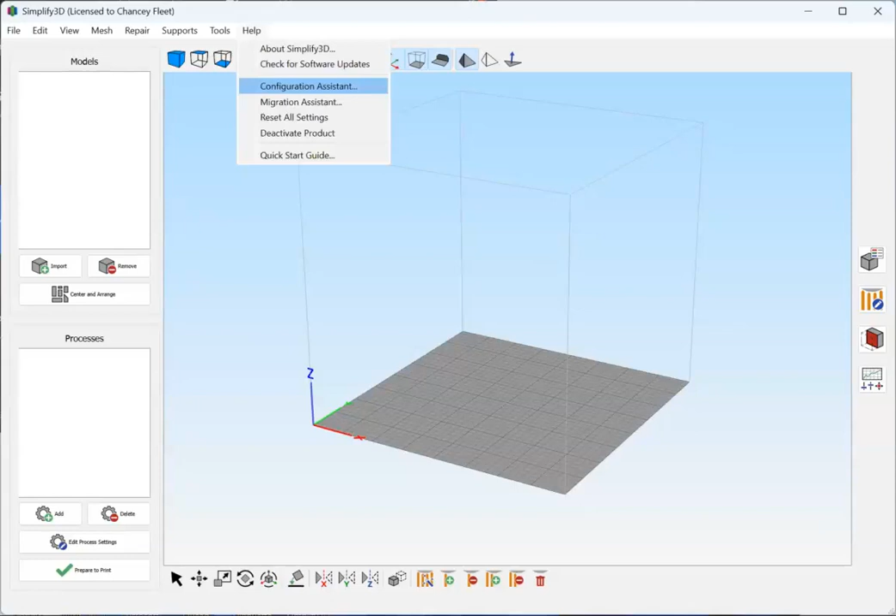File, edit, view, mesh, repair, collapse, supports, tools, collapse, help, collapsed. So I'm coming into help, and I'm going to find the configuration assistant. About, check for software, configuration assistant. And I'm going to press enter on configuration assistant and get myself into the workflow for setting up a printer. Configuration assistant dialog. This wizard will help you configure the software for your 3D printer. Click next to retrieve a list of available profiles and select the best one for your machine.

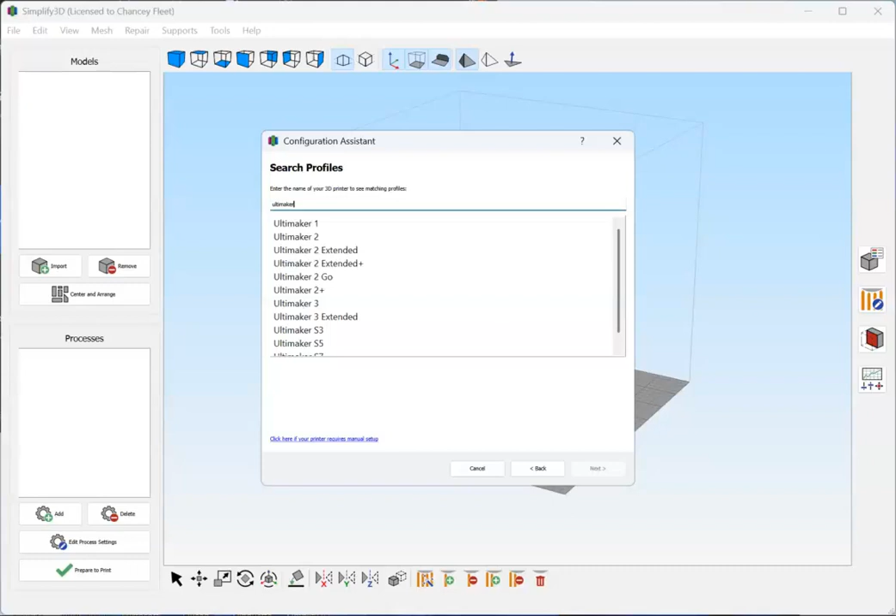Next button. Now I can search for my 3D printer of choice. I'm going to type in Ultimaker and arrow down. Ultimaker. I'm going to have to press enter actually to get to my list of printers. I tab once to get to the list. Ultimaker 1 list item focused. And there's a bunch of them here. I have a 3 beside me. Ultimaker 2 Go list item. Ultimaker 3 list item focused selected.

So I'm experiencing a strange little screen reader artifact where if I arrow down, it is not reading the name of the 3D printer. And if I use my read current field command, my screen reader key with tab, it's not updating. But if I tab and then shift tab, it updates me and gets me to the right place. I'm using NVDA today. I'm using version 5.1 point something of Simplify today. This may impact you and it may not. If it does, just tab away and tab back. Sorry about that. So I've picked Ultimaker 3, which is the printer that I have.

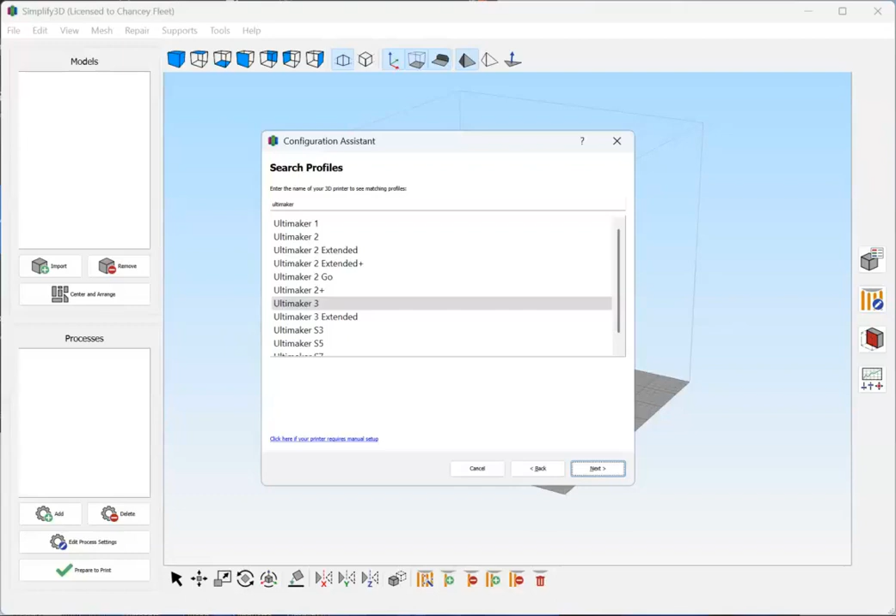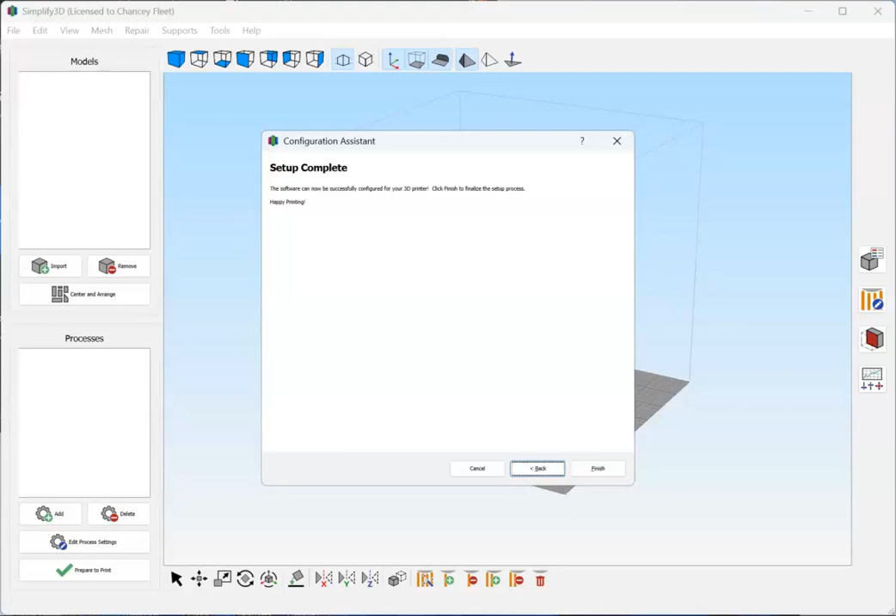Next button, enter. I'm tabbing over to next and pressing enter on that. Finish button. And that's it. I can read my dialog box to confirm that I've done what I needed to do. Simplify 3D, licensed to Chancey Fleet. Configuration assistant dialog. The software can now be successfully configured for your 3D printer. Click finish to finalize the setup process. Happy printing. So I'm going to go to finish and press enter.

Edit process settings dialog. Process name. Edit, focused, process 1. Don't do what I have done when I first started using the software. It's offering me by default process 1. If I have multiple 3D printers, which I do, or if I have processes that I'm going to use for different reasons, like my regular process, my default process, and maybe a fast process, give it a meaningful name. So I'm going to call this one Ultimaker 3 regular. Combo box Ultimaker 3.

So Ultimaker 3 is going to be the printer that I'm using. Select profile. Combo box. And that's the profile that I'm using. So I'm using my previous item with NVDA to read the label that's above this combo box, select profile. The way that you do that will depend on the screen reader. I'm using NVDA with a laptop, so I'm using NVDA, shift left arrow. Select profile. And right arrow. Combo box Ultimaker 3. But that's previous item, next item. So that's all good. We're going to use that profile.

Update profile button. Save any modified settings for the selected. Save as new button. Save button. Grouping. Show advanced button. So most of the options are hidden in advanced. So I'm going to hit space on show advanced. Select models button. Custom zones button. OK button. Extruder tab control. So there's several options here. I tabbed several times to get to sort of the category tabs for settings.

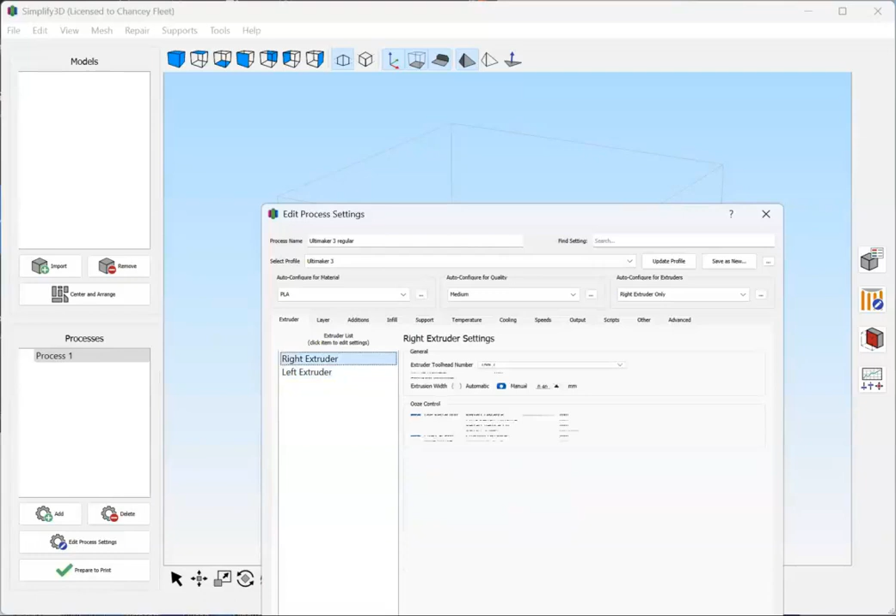General grouping. Spin button 0.90 controls the flow rate for extrusion. Flow rate. Some of these are quite advanced. You can keep tabbing through them if you want to. I won't go through them all. This is where you control the extruder for which you are changing the settings right now. So your choices are left extruder or right extruder. Mine defaults to using the right extruder. And you'd see different options depending on your 3D printer.

I have a dual extruder Ultimaker 3. So one of those extruders can be used for support and the other for regular filament. Or I can use both extruders for regular filament, perhaps in 2 different colors. Typically, I just use one extruder for most models, so it's important for me to just take note of which one I'm using and make sure that I am adjusting the settings for the one that I think I'm adjusting settings for. So I have chosen my right extruder, and I am going to tab into the settings now.

Add extruder button. I can add an extruder or remove one. No need for me to do that. Remove extruder. General grouping. Combo box tool 1. The tool number for the selected extruder will be used for tool change commands. That is pretty technical. I believe it refers to the commands that are in the STL file.

Don't quote me on that. It's not something that we tend to need to change. General grouping. Spin button 0.40. The diameter of the hole at the tip of the nozzle. So extruders come in different diameters. The Ultimaker 3 defaults to 0.4.

If you take a look at your extruder, your tool head, and when I say take a look, you can check what it is that you bought on Amazon or your marketplace of choice. You can check what comes standard in your 3D printer, or if you need to, you can get up close and personal with your tool head using your visual interpreter of choice. Somewhere on your tool head, there will be labels telling you about the diameter in millimeters of your extruder.

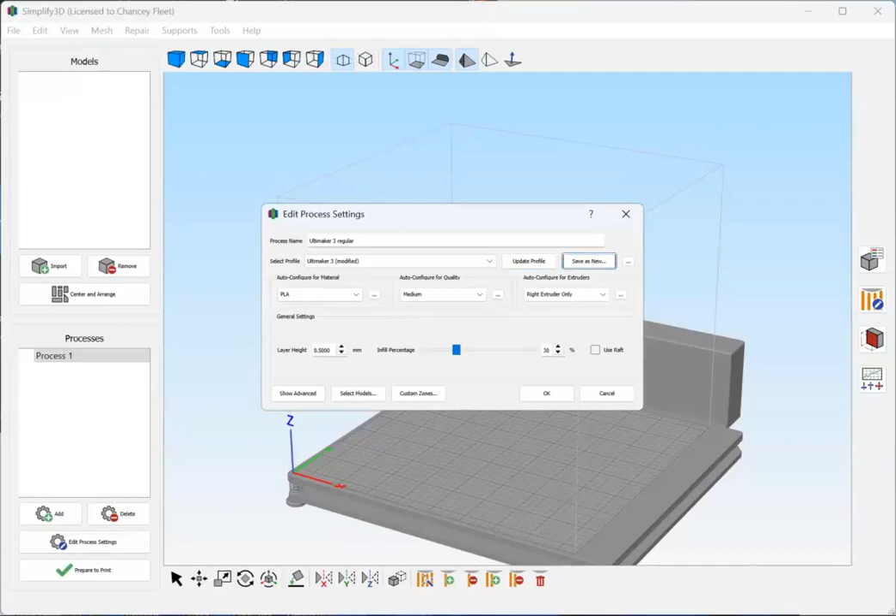So I'm back in my advanced settings. We've gone through extruder. Extruder tab control. I'm going to go to the next tab, which is the layer tab. Layer. And this is where I can specify my layer height and also what happens at the bottom of my part and the top of my part.

I mentioned earlier that when I'm printing tactile graphics, I've learned the hard way that there needs to be a couple layers at the bottom of my part that either have a lot more infill or don't use infill at all, that are solid. So that may be the case for you if you have a part that needs to stand up to wear and tear. So it's a good thing to learn about your layer settings.

General grouping. Combo box, right extruder. Choose the main extruder. So again, I'm choosing which extruder we are addressing right now. General grouping. Spin button 0.5000 is thickness for each layer of the print. So I set this pretty high. I did that in the basic settings a little while ago, and it's reflected here in the advanced settings.

This is where I determine my layer height, and we're at 0.5, which is pretty chunky. It's going to make a visibly striated part where every half a millimeter is a new layer. That is a lot higher than standard. And again, I would do it for rapid prototyping when I really, really don't care about that visual or tactile striation effect.

General grouping. Spin button for the number of solid layers to create at the top of the part. So by default, we've got 4 solid layers at the top of the part. That's so your part doesn't get easily crushed or damaged. It's got 4 solid layers with no missing parts before that honeycomb or other style of infill begins.

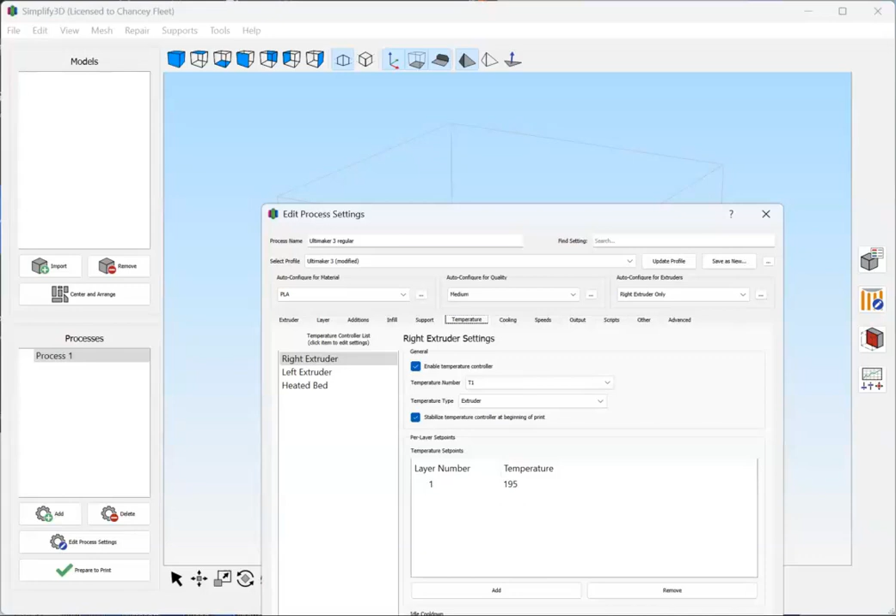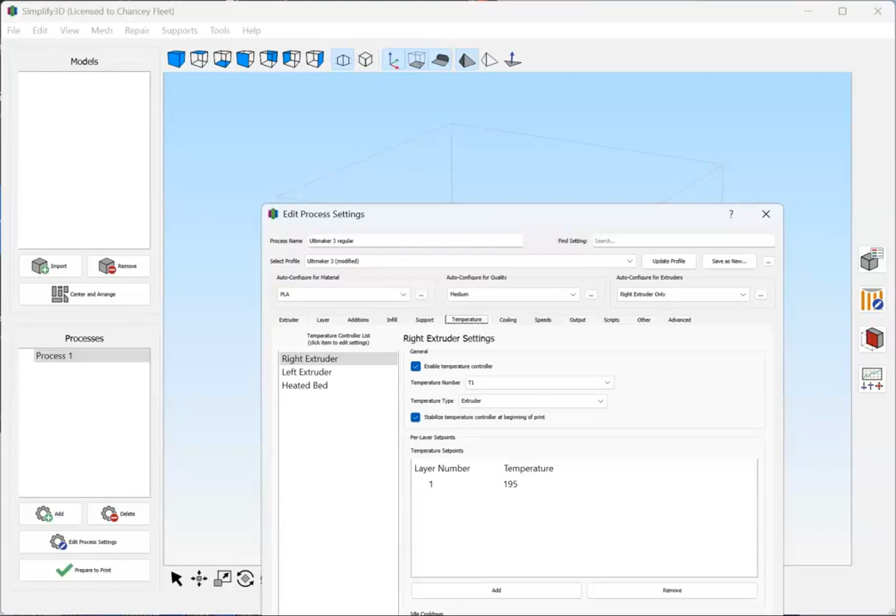Temperature tab. Next up, we have temperature. This is where you can control the precise temperature of your heated bed and the precise temperature of your extruder. And your extruder, of course, is what heats up your filament. Oftentimes, different brands of filament, different brands of PLA, for example, may work better at 10 degrees higher or lower Celsius than the manufacturer recommended default for your printer. Oftentimes you'll get advice about altering the temperature of the heated bed. This is where you can go in and tweak all of those settings.

Cooling tab. This section is about cooling. It pertains to the fans that surround your extruder.

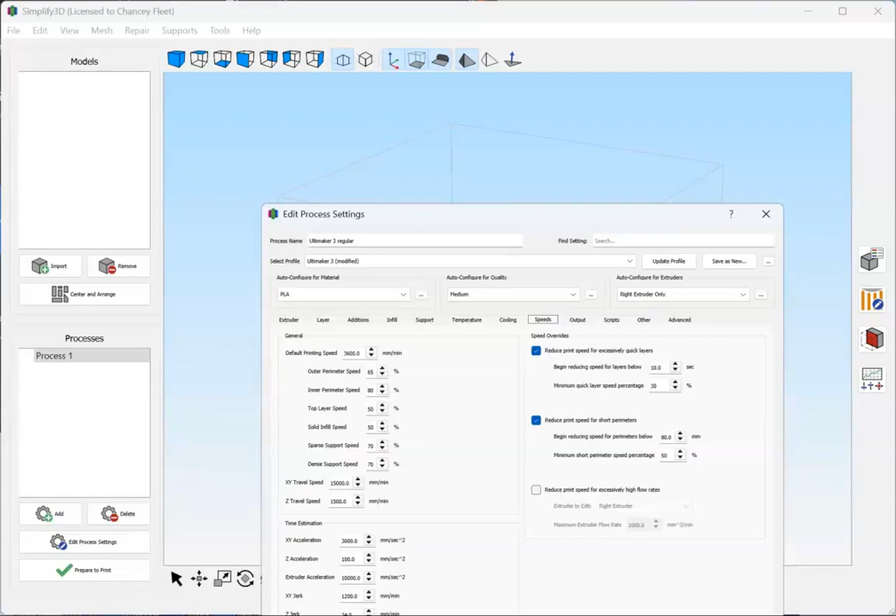Speeds tab. Speeds. So you can drastically increase your printing speed, but there are a lot of things that can go wrong when you increase your printing speed. Depending on the filament that you're using, it may not have cooled down completely by the time the tool head gets back to a layer that it's laid down. And so at high speeds, that might cause globbing and stringing if your filament isn't fully cooled or hardened. You may have some shaking that increases your error rate at high speeds. And you may have other trouble that's based on high speeds.

So typically, the outer limits of what your 3D printer can do mechanically, and that's something that you can go online and look up in the specs, are not recommended for most 3D prints. So always read the forums, read the advice about recommended speeds in addition to the maximum technical speed for your 3D printer, and realize that maxing out your speed oftentimes will not give you the time saving that you think it will, because it's going to cause lots of errors in your print.

Output tab. This next tab, Output, refers to what kind of code file is going to be created for your 3D printer. I'm using the Ultimaker, so it uses G-code. There are other items in here like FlashForge. You can read up on what kind of code your particular 3D printer takes. 9 times out of 10, you're not going to change this. What your 3D printer takes is what your 3D printer takes with respect to the type of code.

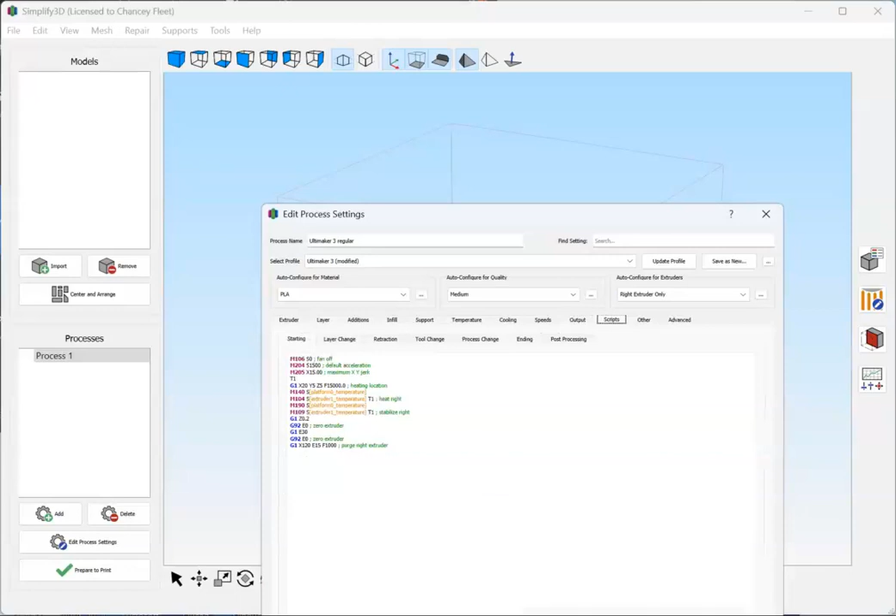Scripts tab. Other tab. Advanced tab. We are going to dispense with scripts, other, and advanced for now, but you can explore them on your own. The important thing to note is that all of these settings are fully accessible.

Cancel button, OK button, enter. And at long last, I'm shift tabbing twice, and I'm going to go to the OK button with space. All right, now I am finally ready to import my model and prepare to print it. So I'm going to tab over and make sure I understand which process I'm running. At this point, I only have one process, so I'm just showing you how I do this.

I'm not in a menu, I'm in the main screen. So you see the cube on which your model can be rendered. I'm going to hit the tab. Remove button, arrange, center, tree view. Ultimaker 3 regular row 1 column 1 level 1. That tree view has my processes. So if I wanted to pick a different process, I could arrow up or down here.

If I wanted to edit this process, maybe change my printing speed, maybe tweak my infill for this model, I would just tab. Add button, delete button, edit process settings button. That's the edit process setting, but there's no need for me to do that now. So I'm going to continue to tab until I find import. Prepare to print, checkbox not checked, checkbox. Import button, import 3D models from disk.

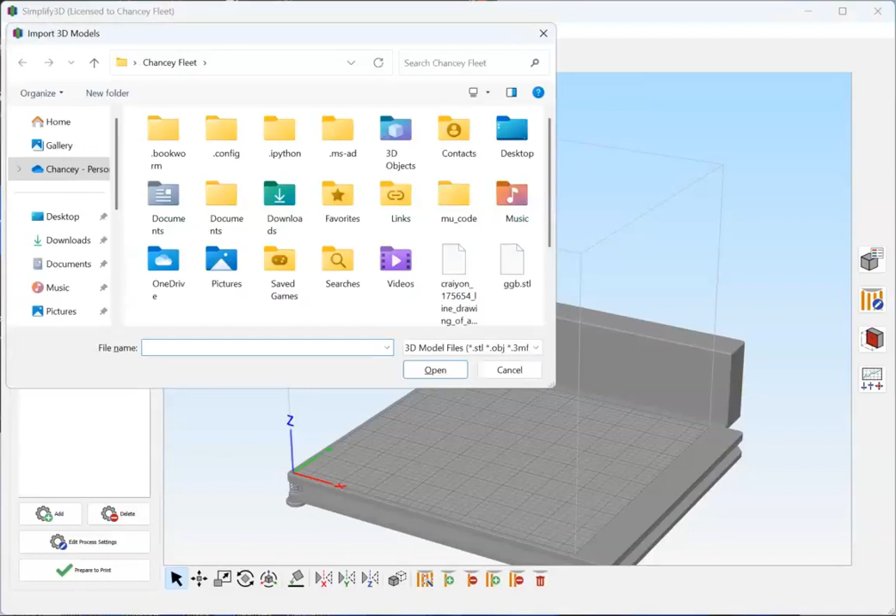I'm going to import a 3D model from my disk. Okay, I'm going to press space on import and pay a visit to my downloads 3D folder. Model, preview. Chancey, start, downloads. I have a model, I don't know if it's any good yet, of a tactile compass. Items, last week, today grouping expanded. Tactile compass. Items view list. Today grouping, images checked, files checked 1 of 2.

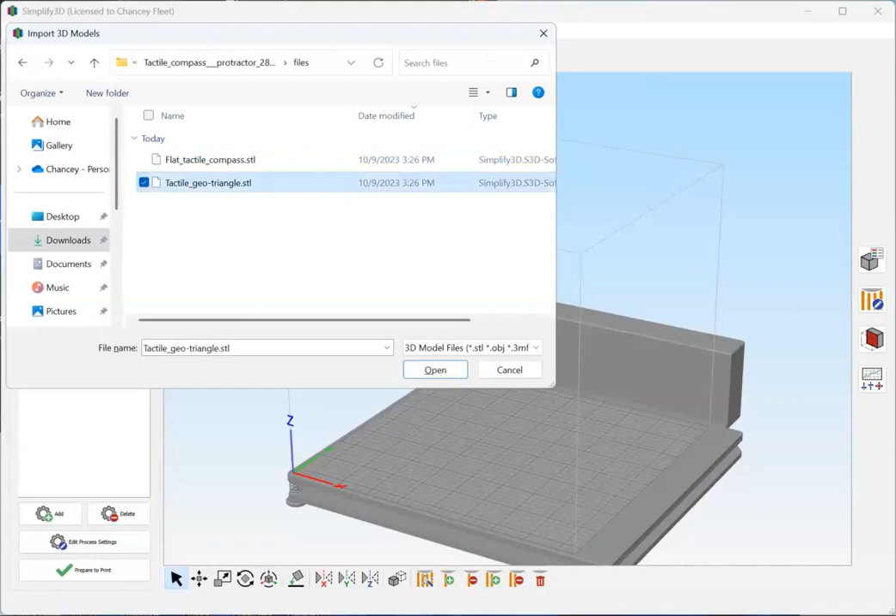I'll choose files. Flat tactile compass, items. And I'll choose flat tactile compass. I'm going to press enter. Simplify 3D, licensed to Chancey Fleet, window. Cross-section list grouping. Tree view. Not checked row 1 column 1. And it now should be showing me a visual preview of the model.

I am going to get ready to save it to a flash drive. I have a flash drive right here, and I'm going to plug it in. Remove button, erase the selected 3D models from the... So I tabbed, and the first thing that I get is remove. If I want to remove the model from the canvas, I can hit space or enter. It is important to note that your canvas is going to contain a 3D model, even if you exit Simplify 3D and come back in.

So tab around, find the tree view that says... Import button, remove button, tree view. Flat tactile compass row 1. Models. It's the only tree view other than the processes one. And arrow through it, make sure there are no models there. If you select a model and tab and hit remove, that'll remove the model. Center and arrange button, pack the models together and center on the middle of the build platform.

So if I have multiple models, let's say that I am making Braille game pieces and I am printing, I don't know, A through J Braille blocks. I can hit center and arrange. This button will automatically pack them close together but not touching and center them on the build platform for the most efficient possible printing, because we wouldn't want them scattered all over the place. We wouldn't want the tool head having to take trips it doesn't have to take.

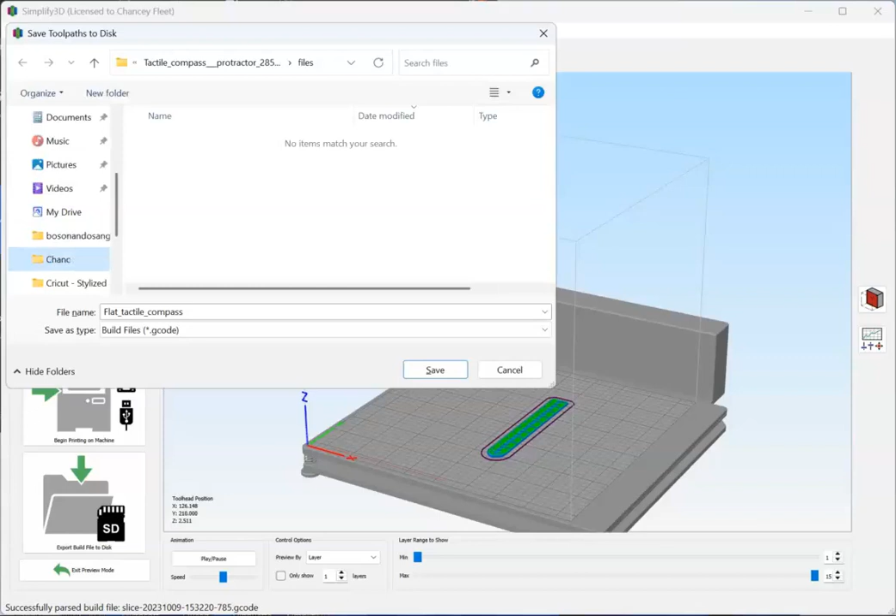Music, flash drive, videos, My Drive and the kit evaluation. End of quick access. This PC, USB drive (D:). There's my D drive. I'll press enter. I'm going to tab back over to the file name. File name. And press enter.

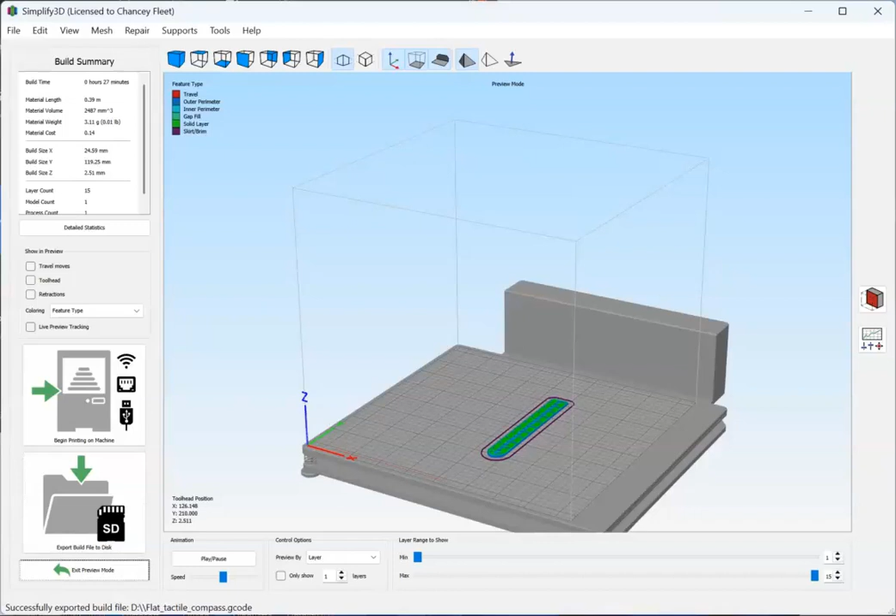Simplify 3D (Licensed to Chancey Fleet) window. Export build file to disk button. Save the currently previewed build file to disk. And I'm done. So now I'm just going to tab one time to get to exit preview mode. Exit preview mode button. Exit the build file preview. Prepare to print button.

I'm back at that screen that has my models, and I am going to do my future self a favor and remove the model so that I don't forget that it's there and end up printing two things next time I come in. Checkbox. Remove. Center. Preview. Add. Ultimaker 3 regular. Add. Delete. Edit. Prepare. Checkbox. Preview. Flat line tactile line. So there's my flat tactile compass. I'm going to tab over.

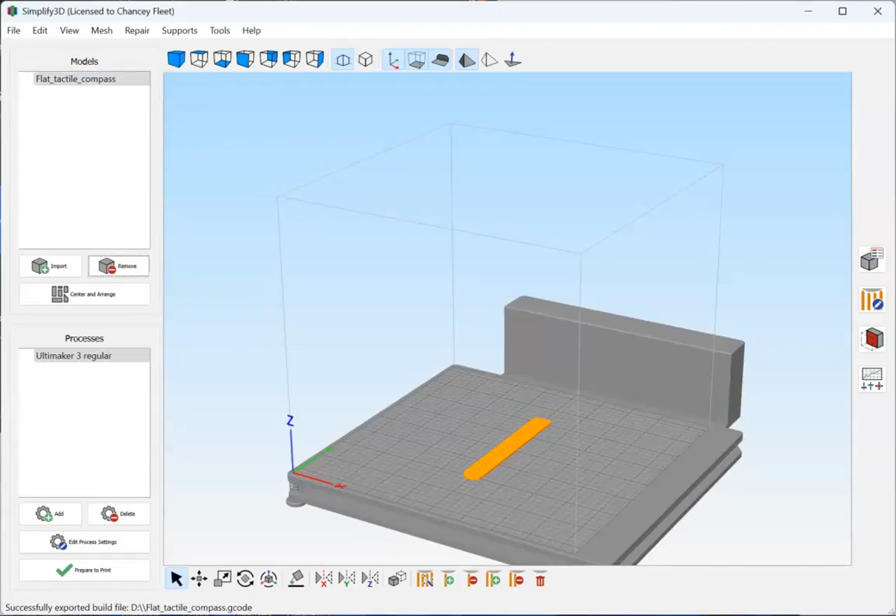Import button. Remove button. Erase the selected 3D models from this. I'm going to hit space. Import. Checkbox. And now there's no tree view. There's just, if I tab to it or shift tab to it, it's just a quiet blank space. Center, and my model is gone. I'm going to leave now with Alt F4. Zoom window.

And now it's time for you to test drive Simplify 3D 5 yourself and let us know how it goes.